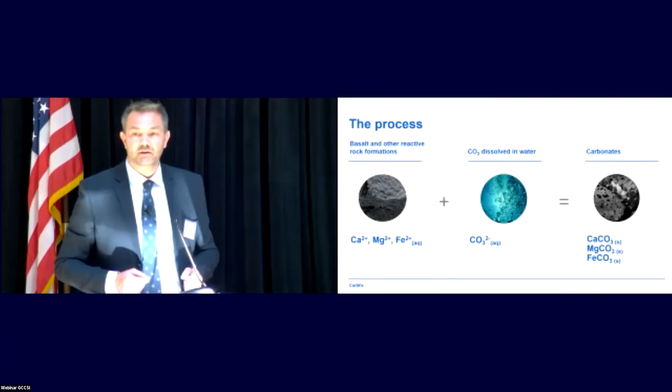Then natural chemical reactions occur. The basaltic rock is rich in cationic ions like calcium, magnesium, and iron. Once the highly acidic liquid comes into contact with these cationic ions, they're released and the mineralization process starts to take place. This process ends with a solid carbonate. So what is happening? We are literally changing CO2 into stone.

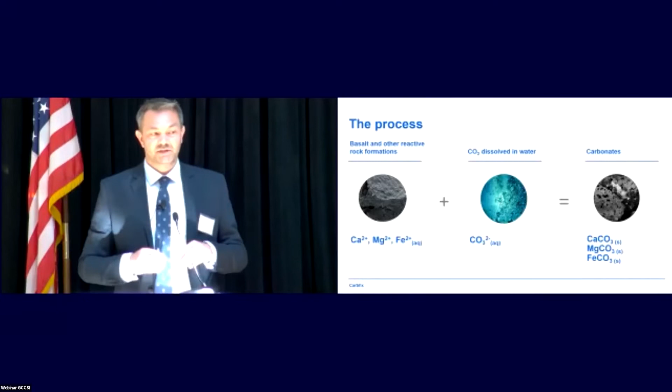There is no risk of leakage as the mineralization takes such a short time. There is a certain static pressure below that makes the actual CO2 heavier than the water, so it has a tendency to sink due to solubility trapping. So all in all, the CO2 becomes part of the rock in less than 2 years.

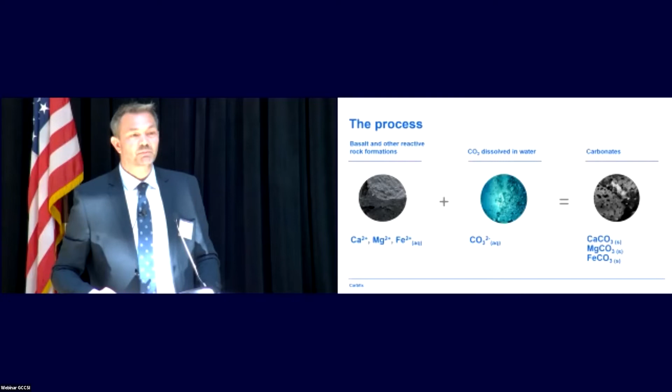This is, let's say, our home originally. We are actually owned by Reykjavik Energy, the utility company out of Reykjavik, which was hosting the research project between the three universities. We were a research project until January 2020, when it was decided we should scale up the technology. Our TRL level was at 9 at that time, and we were already running one commercial project.

Currently, we are running 2 commercial projects, and a half, let's say, because that one will be fully commercialized by the end of the year. So we are actually operating capturing. We do have a proprietary technology in capturing, but our focus will be on actual injection.

We are running, capturing directly from the source at that geothermal facility, but we are 100% agnostic in terms of industries, and furthermore 100% agnostic in terms of technologies. So we are working with Climeworks, mentioned here briefly before, because Climeworks is actually the first operator on a commercial level for direct air capture, and that's hosted by us at our facility, Hellisheiði in Iceland.

As I said before, this is not limited to Iceland. The storage capacity in Iceland is estimated to be a huge number: 2,500 billion tons of CO2. That's a significant number. On a global basis, about 100,000 billion tons, an even bigger number. North America is estimated at around 7,500 billion tons. So definitely it's not limited to Iceland.

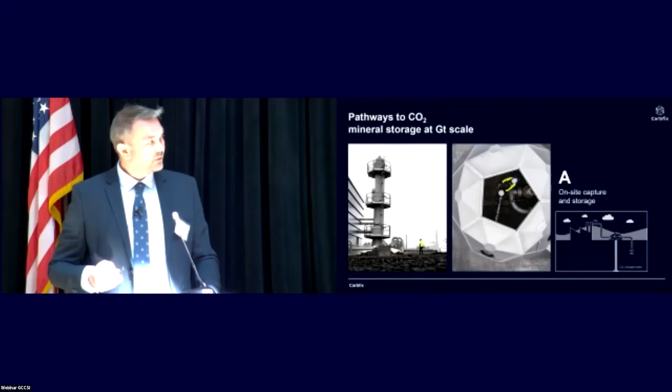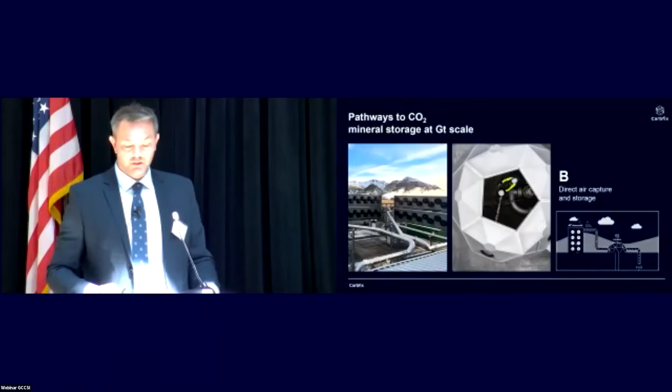The way we enhance going forward is through 3 paths. The first is mineral storage at the site, where the emitter is located. If it's located in a geologically favorable area, we can inject the CO2 into the ground and the mineralization can take place. Furthermore, regarding direct air capture — wherever it wants to put its foot down and the geological conditions are favorable, we can utilize this technology.

The third path is using transport to storage mineral hubs. This is a project we're enabling in Iceland, where emitters are not located at a favorable geological site. So we would transport it, whether through pipelines, railways, vessels, or whatever it means. This is an actual storage site we are planning to build. It has already started the FEED study, and we've already started the environmental impact assessment. This is a project we applied for with the European Innovation Fund, so it will be built, and we will start in 2026.

From an operational point of view, it will start at 500,000 tons per year, scale up to 1 million tons, then 3 million tons in 2031. Parallel to these 3 paths, we envision that all of these will be set up across the globe, not only in Iceland. Iceland is not thought of as a dumping place for CO2 — it's simply a demonstration of the scalability of the technology.

So the Coda Terminal is the entire value chain. We are, as I said, agnostic in terms of who the actual emitter is and who the capturing company of the CO2 is. We will move it with our partner Dan-Unity. They are building vessels whose only purpose is CO2 transport. These vessels will be about 22,000 cubic meters — quite big vessels, about 3 times larger than the Longship project in Norway.

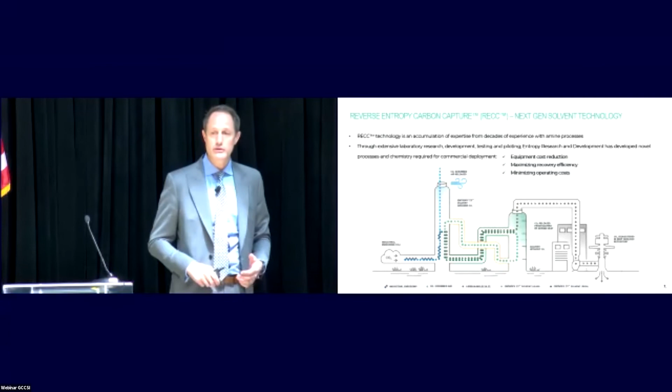So this is a new industry. There was only a carbon market that was created with the 45Q, call it a year and a half ago, and in Canada, the carbon tax, and of course in Europe you have the ETS. This is a new business. First gen, too expensive to do at the current carbon pricing.

Second gen, I would call second gen sort of ended around 2011. There was a global research project run out of the University of Regina in Saskatchewan. Yes, also Saskatchewan. Why? Because Saskatchewan needed the CO2 for an EOR scheme, an enhanced oil recovery scheme. They came up with this as a global consortium. U of R was looked to by the UN IPCC to say, how do you do this? That's where they went, U of R. Exxon came, Shell came, Equinor came, Aker Carbon Capture was there. All these different companies went to learn how to do post-combustion carbon capture from U of R, because U of R was doing this since 1987 in anticipation of the need, okay?

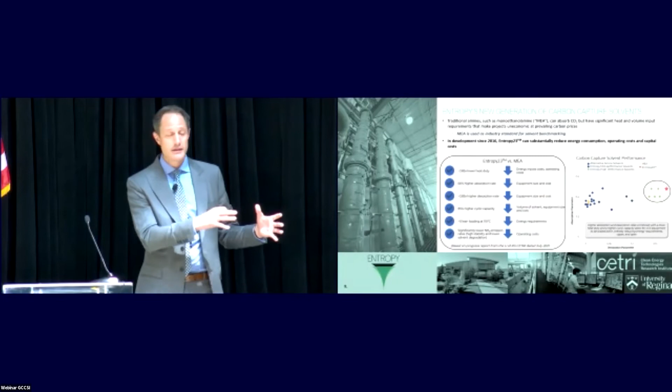So they achieved a brand new level, we would call second gen. That's exactly the level that we start from with Entropy, because those professors that did the work, the research facility that created this outcome, we've essentially purchased all the new technology that came out of that. We've patented it, we own it, and the next step came 5 years later, 2016, the discovery of a brand new solvent. This solvent is the best solvent in the world by judgment of these independent researchers. It allows everything to happen cheaper, smaller, less energy, cost down. Essentially the same as the first gen technology, just cheaper. So that's pretty important stuff.

The outcome is this project. This is the first project in the world on a gas-fired industrial emissions facility. It'll be starting up in 2 weeks. A lot of people aren't aware of that fact. It's the first one ever done on gas-fired. So this happening, phase 1 will be on 50,000 tons per annum. Phase 2 will be on in the first quarter next year, and the full plant will be complete by the end of next year, 200,000 tons per annum. This is the culmination of all that research, 35 years of work.

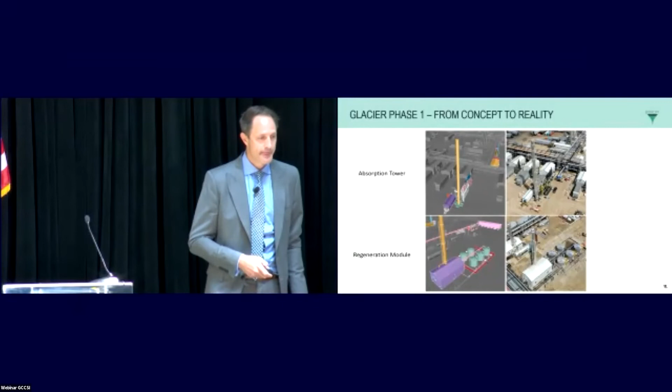Well, it's always fun to point this out. This is what it looks like. On the left, you have a 3D model, the colored tower is the contactor tower. On the right, you have it in real life. This is currently just northwest of Edmonton, Alberta. This is the compression, this is a gas compression. They're burning gas inside of engines, and the exhaust from those engines is being captured. The regeneration module is where you reboil that solvent and get the CO2 off the back end.

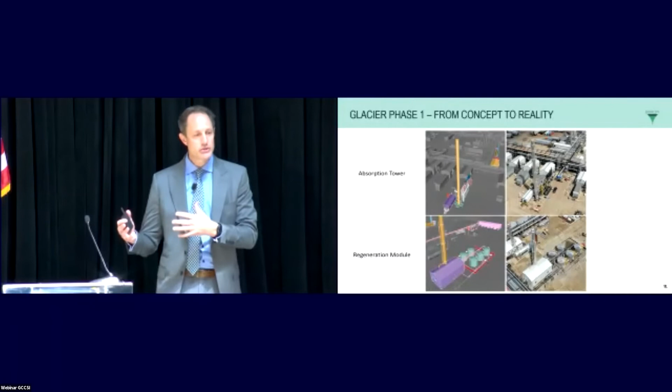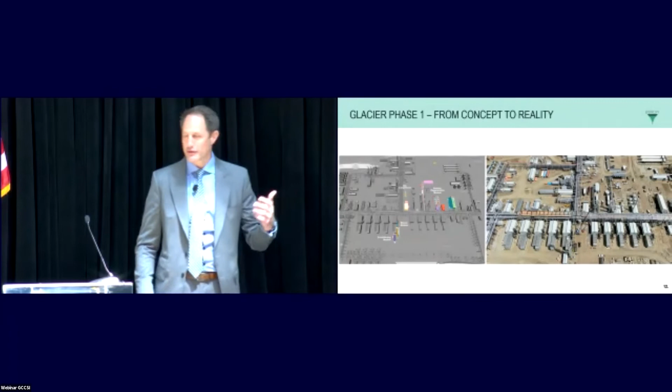The very important parts. And then if you look at the entire facility, every one of those little boxes on the bottom half of this picture, those are all compressors with engines. Every one of those engines is spewing out hundreds of, per year, 16,000 tons per year. So you put a contactor module on every one of those units, you capture 200,000 tons per year. The market will deliver these solutions as long as the market itself is functional.

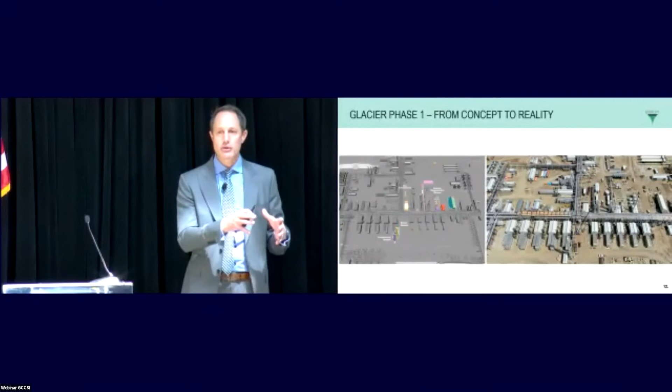I won't talk about this much, except for the fact that Entropy really is, unless there's a secret developer, we're now the largest developer of post-combustion carbon capture projects in the world, over 10 megatons per annum.

And that happened very quickly. We only started to go public with this about a year and 2 months ago. But the fact is that the technology is quite unique. We just happen to be a couple years ahead on putting the business together. Some economics I could skip past.

A few words on storage. Again, CarbFix is a fantastic technology to make sure you take away any of that concern about leakage. The technology for disposing of industrial waste fluids is actually well established. It's about a 100-year-old technology. It's simply using saline aquifers that are high permeability. You displace the existing water that's down there with the new fluid that you're injecting.

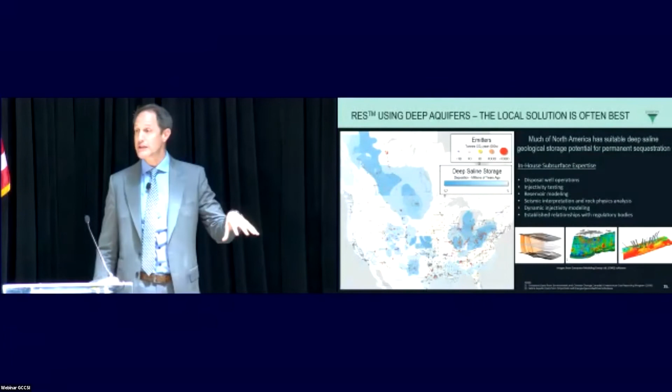Our background in industry has been to dispose of acid gas, including CO2 and H2S. Does anybody know what H2S is? How much H2S does it take to kill a person? Anybody? About 100 parts per million. It's a tiny number. That's the practice that industry has had dealing with disposal of waste fluids. That happens all over the world right now, where you have an industrial waste fluid that gets concentrated and injected down safely. If there's a leak of H2S, it will instantly kill everyone within a mile, right? I should move faster, I'm sorry.

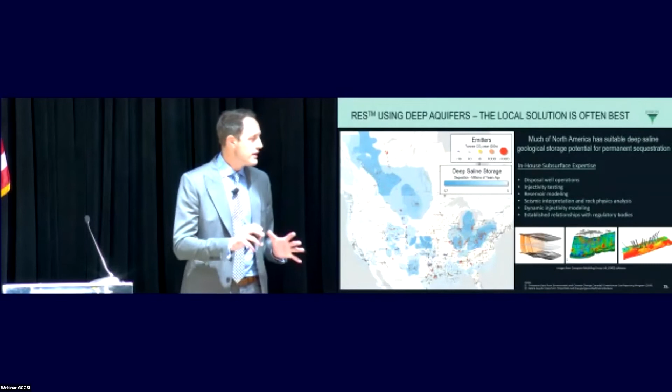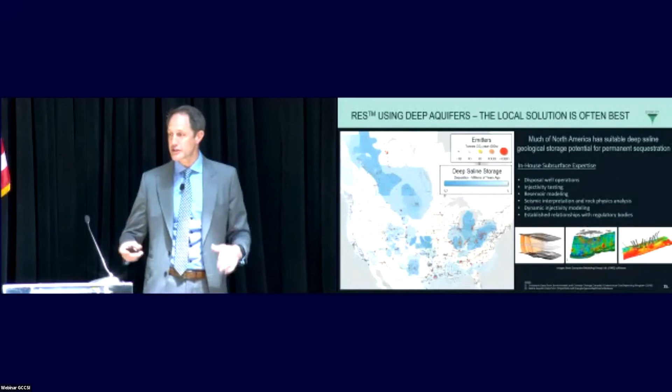CO2 is not poisonous. It is not noxious, doesn't explode. If there's a leak of CO2, you fix the leak. You pay the carbon tax for the leak. So this is not something that's hard. This is something that's well done. Let's not focus too much on the risk there. Let's just make sure the education is good. And with that, I'd say functional carbon market, my sign off.

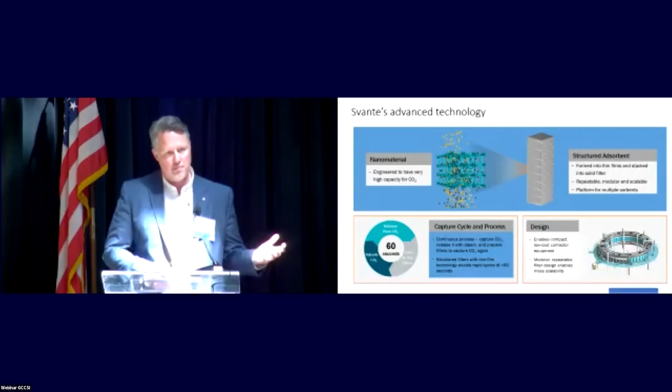So we essentially take a carbon fiber substrate. We put the sorbent material on it, we impregnate it on the front and the back, and we form it into a filter. So we take those filters, we make sure that the flue gas doesn't channel. We then put it into a rotary contactor. That contactor, A, adsorbs CO2, B, desorbs CO2, and then we condition the bed getting ready. That makes one rotation about every 60 seconds.

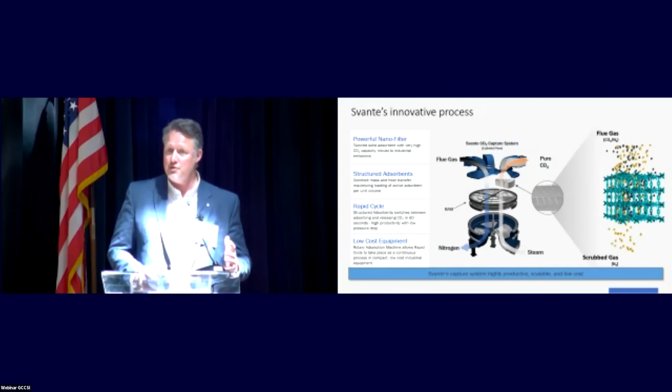To get a little bit more granular, we are point source capture and direct air capture. So we create these filters with different sorbent materials to work for both direct air capture and point source. In this case, the point source, we take the flue gas, we cool it down to around 45 degrees C. It adsorbs onto the filter. We then countercurrent steam at around 120 degrees C. We desorb the CO2, and then we condition the bed. So very, very simple process. It's no volatile emissions. Something that's easy to understand.

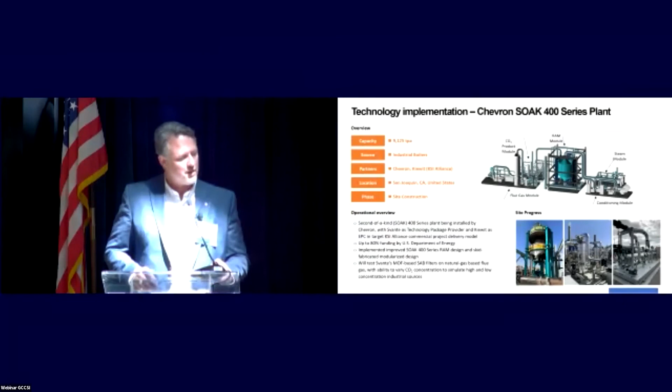Essentially, again, you can see the process. It's a little more modular. We take the flue gas, condition it, send it through our rotary adsorption machine. We then hit it with steam, desorb the CO2, and then we condition the beds. Those pictures in the bottom right-hand side were taken a couple of weeks ago.

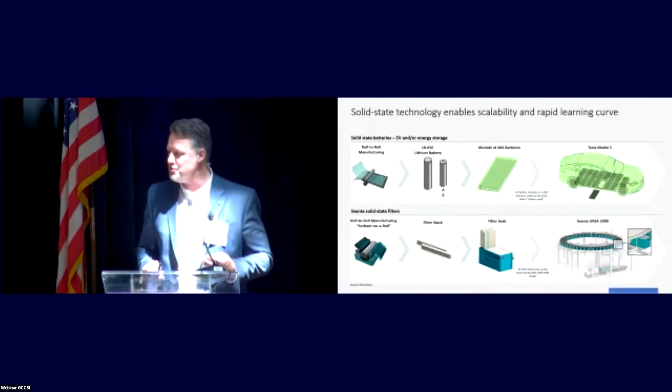And I guess the analogy is we've got to be ready for this. Every speaker this morning talked about it. We're talking about gigaton scale, right? We can't wait for POs. We can't wait. Everybody's getting ready. They're doing their studies. They're doing their FEEDs. And every company is getting up to the starting line, and they're trying to figure out what technology to use.

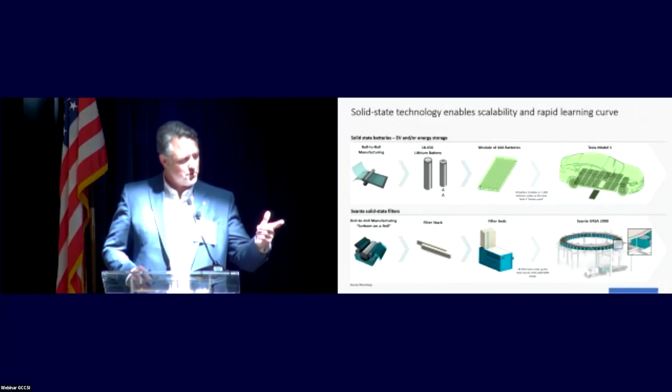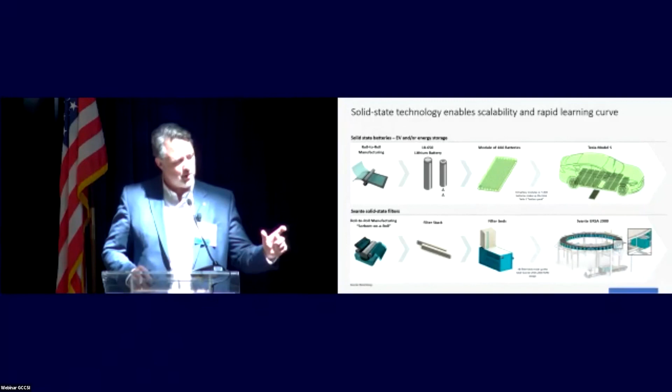So the analogy is we're going to have this production facility that we're investing about $100 million into. That'll be ready by the end of next year. And it's going to be largely patterned on battery manufacturing. So the analogy is roll to roll. In a battery perspective, you create the batteries, you put the batteries in a module, you then insert the module into the unit, and it's the exact same for us. We have sorbent on a roll, we take those filter stacks and create a filter bed, and then those beds go into the rotary filter that is designed for the client.

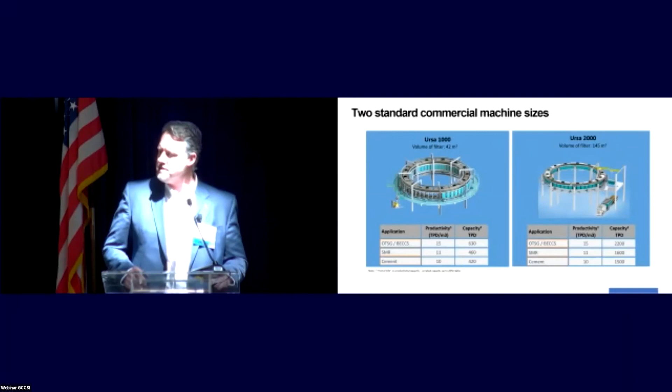So this is what it is. It's essentially somewhere between 400 tons a day and up to 2,200 tons a day, and if you want more than that, you piece them together. Pretty elegant solution. It's not a complex chemical facility. It's a pretty simple rotary mechanical filter.

And again, we couldn't do this without our partners. BASF, we were just over to see them. We're going to have production facilities in Germany and the US. 3M, this is a perfect fit for them. They're a great company. From an EPC perspective, we've got that on the go, and a lot of interesting partnerships, including one whose name we've heard a lot today because of their recent success with Climeworks. We're working with them.

I think that's it. So the other thing happening for us is we've been around for about 15 years. So we've been operating this for a long time. It's not a new technology. It's a technology that we're scaling. For all the bankers out there, we're currently in a Series E financing round that closes probably in about a month, and lots of good things happening, very positive.